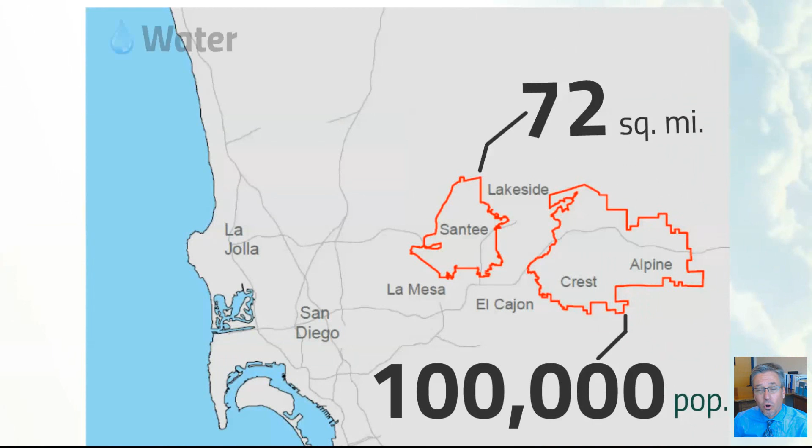First of all, water is like no other commodity. It touches every aspect of society, and it directly relates specifically to public health, safety, and our economy. The Water District was formed in 1955. Our mission is to provide highest quality service at the lowest possible cost. We have a rather unique water district, 72 square miles, a population of about 100,000 people. We have 4 core business components: water, recycled water, wastewater, and Santee Lakes.

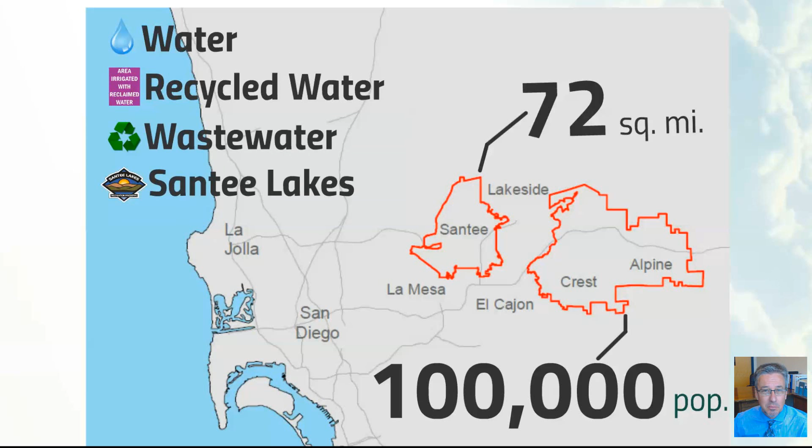And it's important to note that Santee Lakes, we're very proud of it. And we're proud of the fact that it is self-sufficient. It does not receive any tax or ratepayer subsidy. So none of our water or sewer fees that go to the district go to Santee Lakes. It is completely standalone, and it's a beautiful place. I encourage you to come out and check it out.

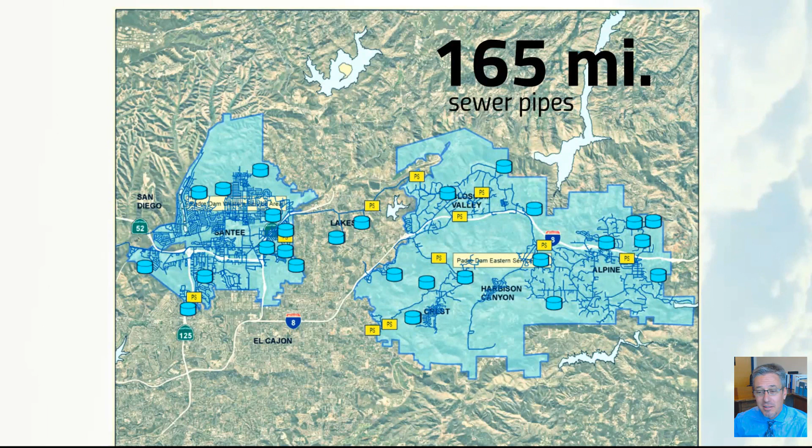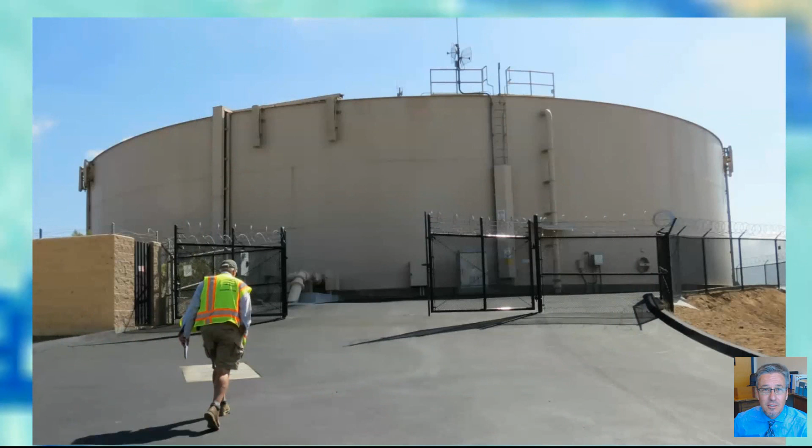A little bit more about Padre Dam: over 160 miles of sewer mains, almost 400 miles of water mains. We have 29 reservoirs throughout the water district and 19 pump stations. Reservoirs, you've seen many of these around the community. These are rather capital intensive facilities. This one, for example, is a 2 million gallon tank. The replacement cost of a facility like this is in the neighborhood of $7 to $10 million.

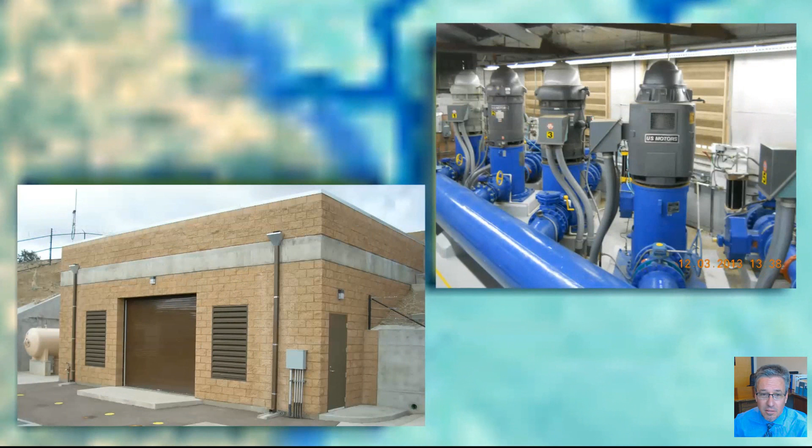Pump stations scattered throughout, again, the district. These are very expensive facilities as well. We have about $30 million invested in these pump facilities with a maintenance staff to keep the water flowing throughout our large water district. So just a little bit about the system and the work that is involved in maintaining that system. There are so many programs and projects and activities that occur in the maintenance area on the water and wastewater system every day. It's hard to pick just a few, but here's a couple just to highlight.

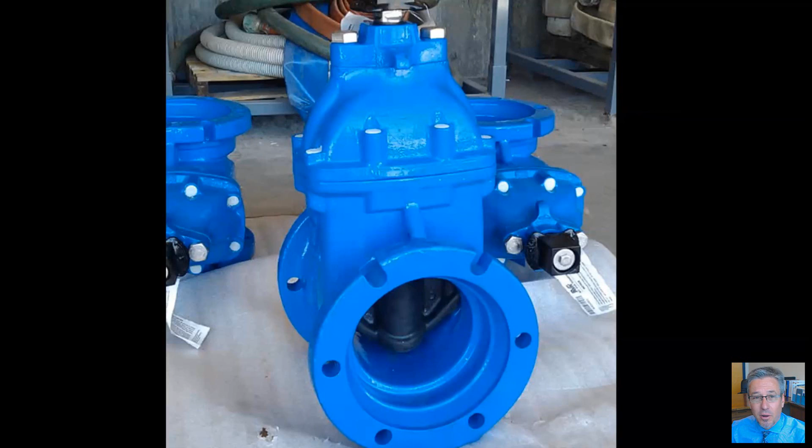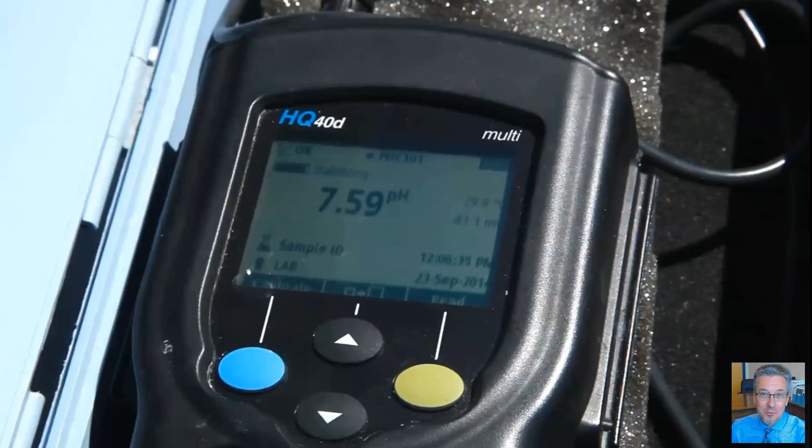This is our valve replacement program. We have over 9,000 valves in the system. These valves age and decay. It's important for us to replace these valves so that the system operates at an optimal level. In our water quality department, we have somebody watching the system 24/7, making sure that there's water in all of the reservoirs, that it's being moved appropriately around the district, that our water quality is at the highest level. And again, this is important work.

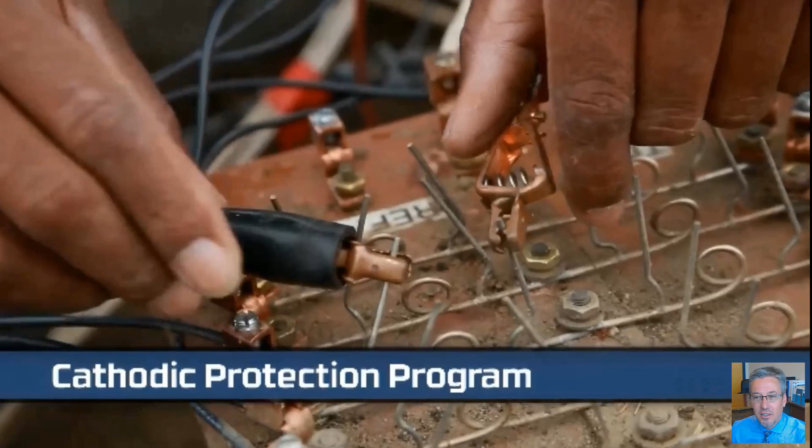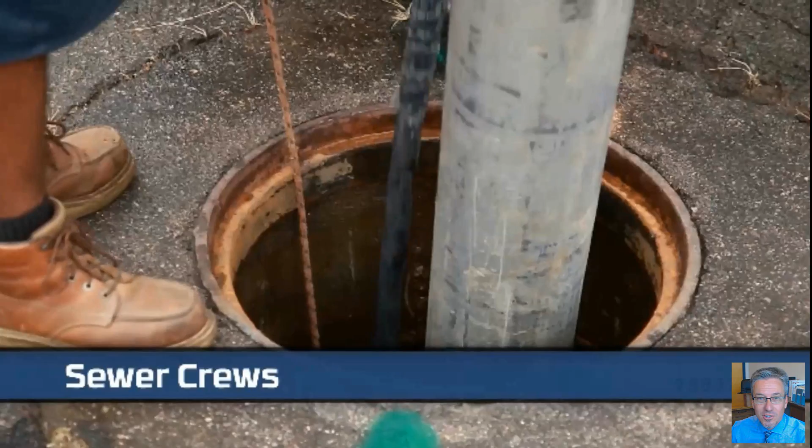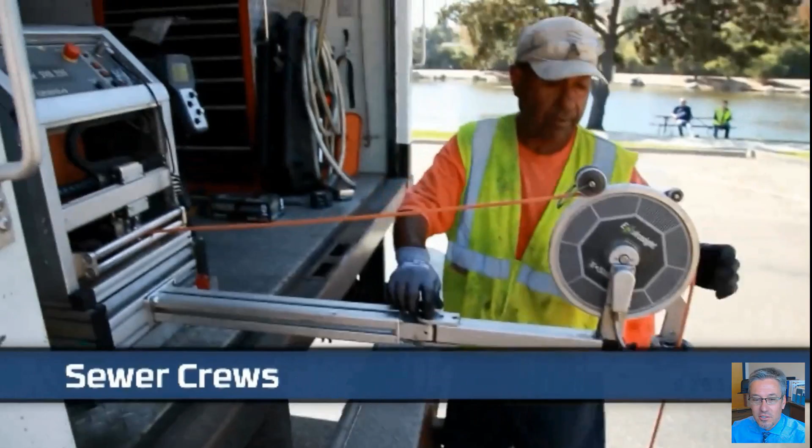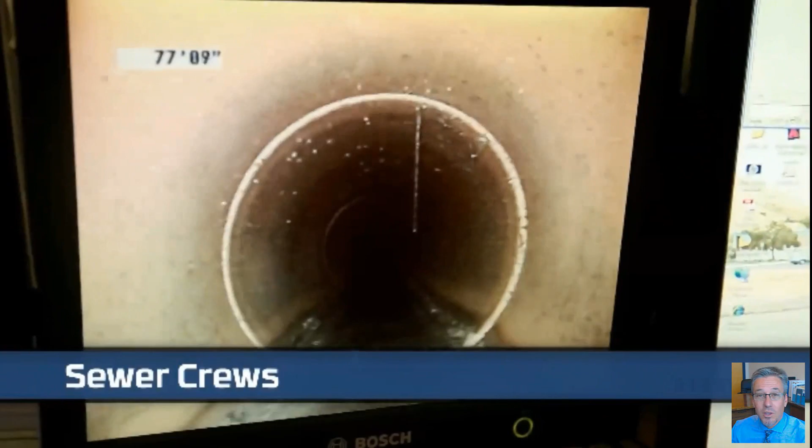Cathodic protection is an area where this group works to extend the life of all of our facilities and infrastructure through coatings, through cathodic protection devices, and again, this maximizes our investments. Sewer crews are on the western end of the service area, primarily in Santee. So if you're a western service area customer and you have sewer services with us, you will see these crews around your community. The system is very intricate and involved. We camera the system on a regular basis to make sure that it's working appropriately and that we can get ahead of any kind of potential failures in the system before they happen, hopefully.

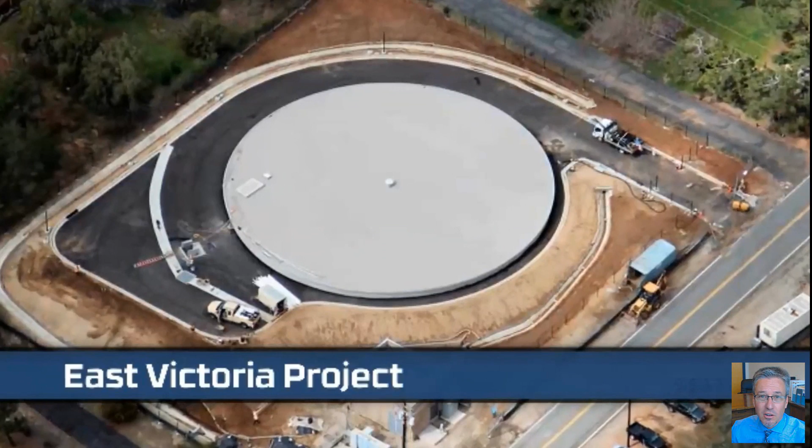Capital improvement is also an important program. These are multi-million-dollar projects investing in your system. Here's an example of a roof change-out. This is a reservoir roof.

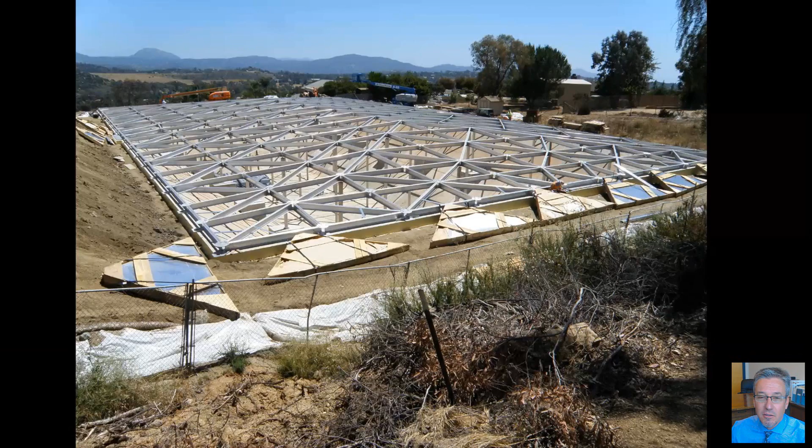This project, for example, was a $5.5 million roof retrofit project. So that's a little bit about your district. Let's get right into the dollars. Okay, so why is it important for us to make rate adjustments?

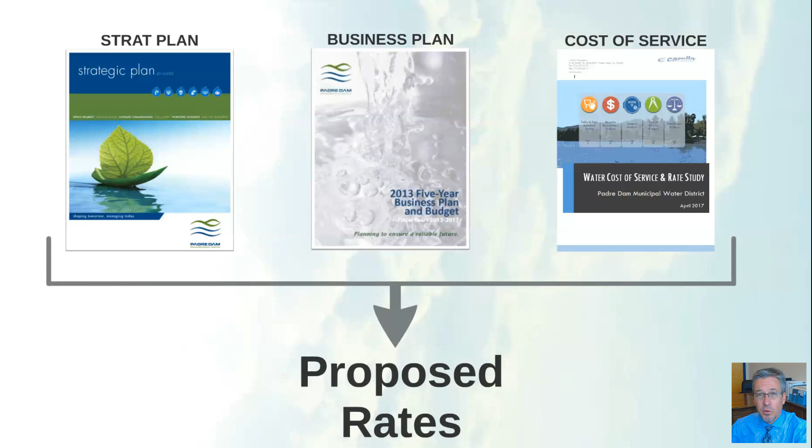Everything that we do centers around a plan. We have a strategic plan, a 10-year strategic plan that feeds into a 5-year business plan. And then what we do is we conduct what's called a cost of service study to determine how much it will cost to adequately maintain your water and wastewater systems. All of these plans and a cost of service study feed into the proposed rates. When we do the cost of service study, it tells us how much it will cost to maintain these systems.

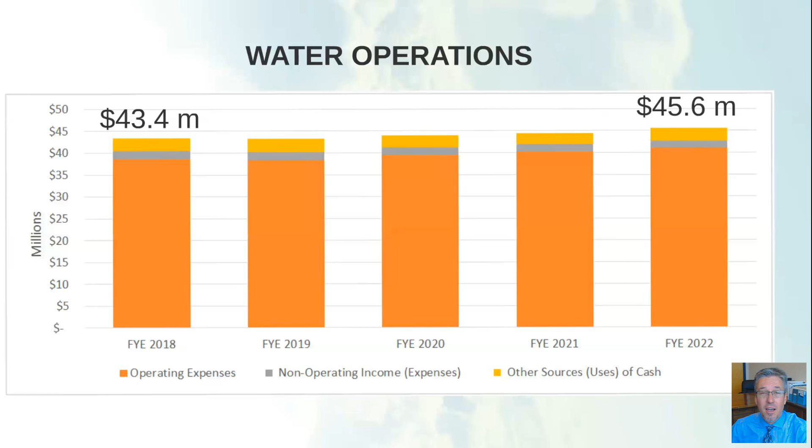On the water operations side, this is a chart that shows 2018 to 2022, and it shows us that in 2018, the cost to maintain that system will be $43.4 million. In 2022, that number will be $45.6 million, an increase. On the sewer side, same analysis, 2018, the system will require $15.7 million to maintain at an appropriate level. That number goes to $17.4 million to maintain at an appropriate level by 2022.

So the question, I think an appropriate question, is what is causing these rate increases? Cost of living continues to go up, as you know, in your household budget. There's some drivers on the district side that have caused these fees and cost expenses to go up. Regulatory compliance, legal compliance, energy costs, construction, materials and supplies, and insurance all are examples of increases that impact the cost to maintain this system.

I think an appropriate question is to ask, okay, what has the district done to mitigate some of these costs? What have you done to control expenses? I want to share with you just a couple. There's numerous to share, but we only have time for a couple. One of the most expensive components of our budget, of course, is employees. And what have we done in this area to help mitigate costs? With reduced water demands, what have we done to again mitigate those additional expenses?

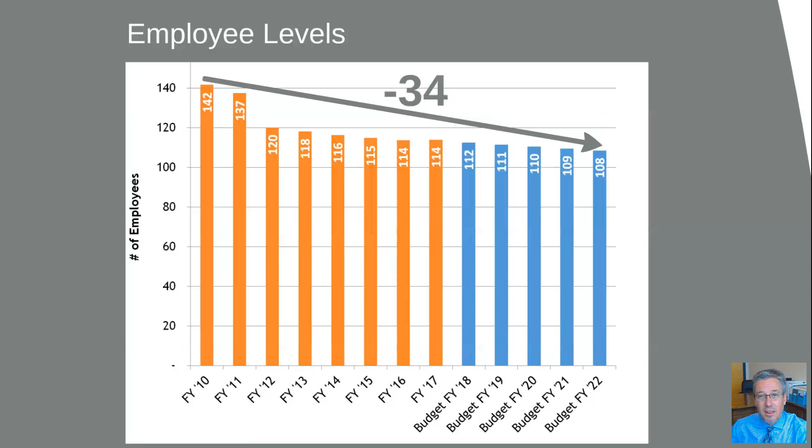Employee levels. This is a chart that shows back in 2010 we had 142 full-time employees at Padre Dam. Today, 2017, we have 114, a significant reduction. And then the blue bars show the next 5-year business plan and how we're proposing to go down another 5 to 6 full-time equivalents. So we will go down a total of 34 positions at Padre Dam, again, in efforts to mitigate and control the rate adjustments as best as we can.

So the big question, I think, for you is, what is the monthly impact? You're talking about rate increases. You're talking about adjusting our rates. What is that going to look like on my monthly water and sewer bill? Here is what we believe that's going to look like.

So this is a water bill example, and we have three different types of customers. We have a low water user. We have a typical customer that uses about 900 cubic feet per month. That's a typical customer in our district. You might fall into that category. And then we have a very high user, 30 HCF per month. This is a very high water user. So we wanted to give you three examples of what this looks like.

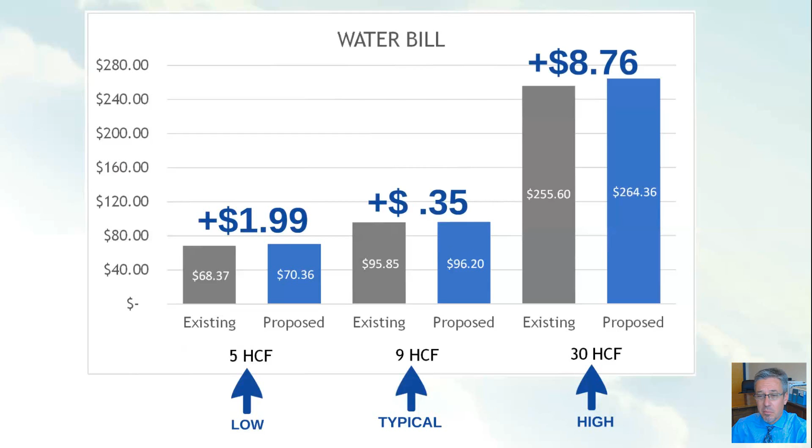So what is the bill impact? What is the monthly impact for each of these types of customers? For the low water user, it's about $2 a month increase on your water bill. For the typical customer, it's only 35 cents per month increase on the water bill. And then for the high user, of course, a little bit higher, about $8.76 per month increase on the bill. That's the water side.

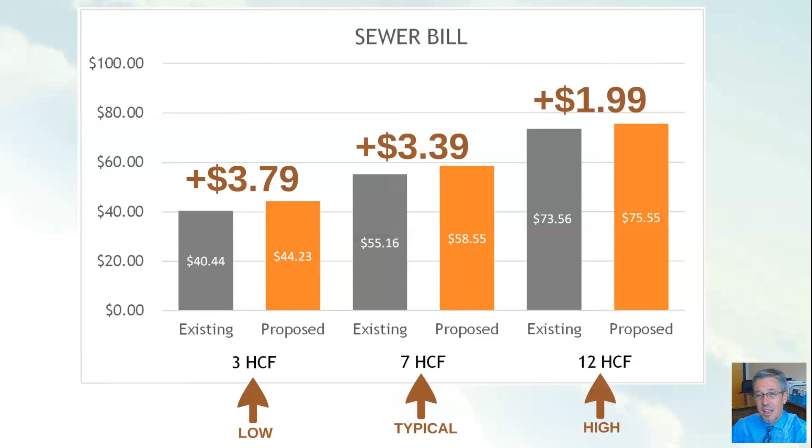On the sewer side, similar analysis. A low water user, 300 cubic feet, is about $3.79 increase per month. The typical customer, about 7 HCF, that's about $3.39 per month. And then a high user, 12 HCF, is about $2 per month increase. So that gives you an example of what you can expect on your water and sewer bill in terms of increases that we're proposing through this new 5-year business plan.

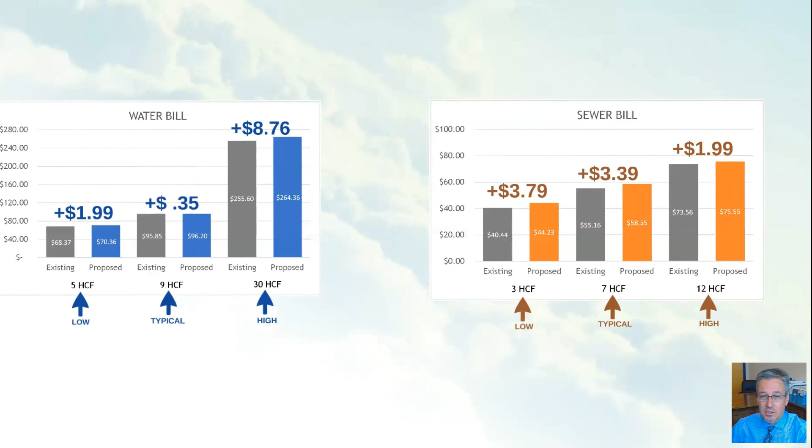I think another component that you need to be aware of is something that we don't have control over, and that is where we buy our water, the San Diego County Water Authority, and where we send about half of our wastewater, San Diego Metro wastewater system. These are costs that are passed through to customers, and we can only estimate on what those are going to look like. And we've done that for you here.

We estimate that the cost of your water on the water side through County Water Authority, a pass-through, will be equivalent to about $1 per month increase. Now this is $1 on top of, let's say, the typical water customer on the Padre side of 35 cents. So the total would be $1.35 increase on your water bill. On the wastewater side, we think that increase is going to be about $1.70. Again, you need to add these numbers to the Padre Dam increase, and that gives you your total bill impact. But these are pass-throughs that you should be aware of.

You need to know that we buy our water from County Water Authority. Their rates go up as well, and we have no control over that. And then the San Diego Metro wastewater, their rates go up as well, and these are passed through to the customers. We want to make you aware of that.

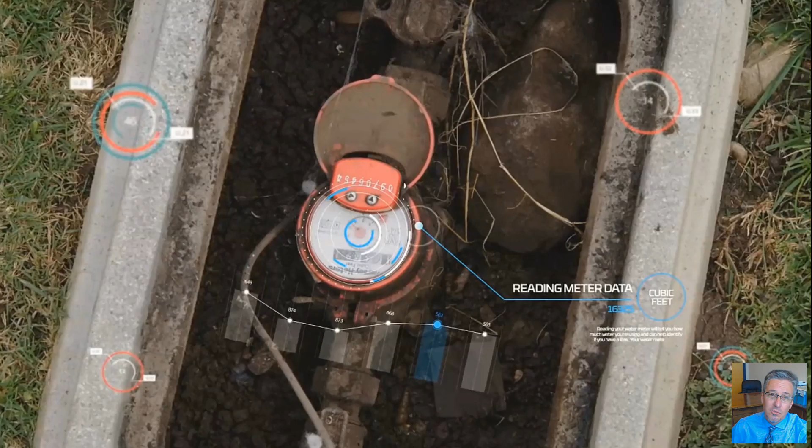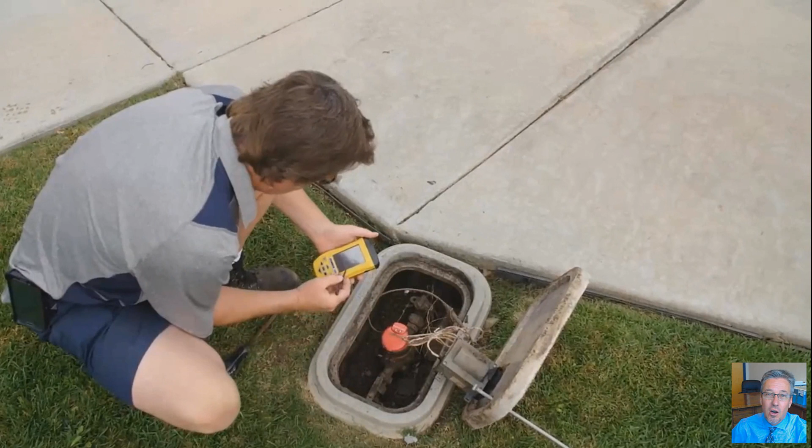So we also want to make you aware that we have tools and resources available to you. We have resources that help you control your water use and lower your water bill. We have an automatic meter reading system that sends data to our headquarters, and then that data is available to you online through a system called Aquahawk. You can log onto our website, access your account, and see exactly how much water you're using. You can set alerts, so if you use more water in a day than you typically do, you can get a text message that says, hey, something doesn't look quite right.

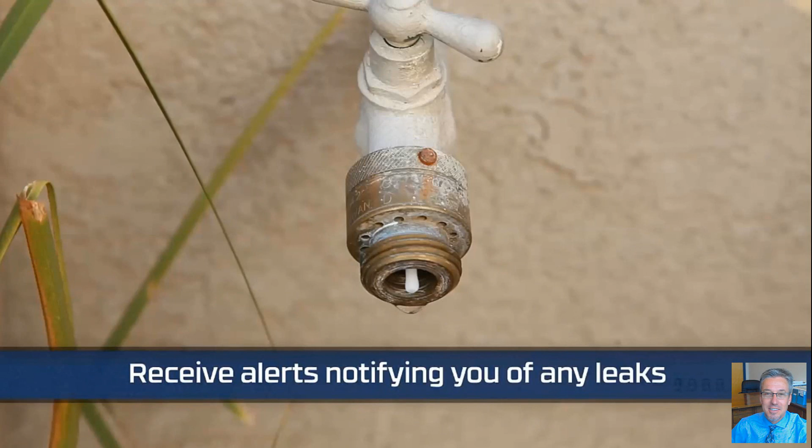Or if you have a leak, it will tell you that you've got a continuous flow, again, giving you a text message or an email to let you know that something isn't quite right with your water use. Our customer service staff stand by ready to help you in that regard.

In 2007, we were selling almost 16,000 acre feet of water. We buy water in acre feet. An acre foot is, if you envision a football field, about a foot high with water. That amount of water satisfies two typical single-family homes for about a year. Just as an FYI. So we were selling almost 16,000 acre feet back in 2007. Today, in 2016-17, we're only selling 8,000 acre feet, half of the water that we used to.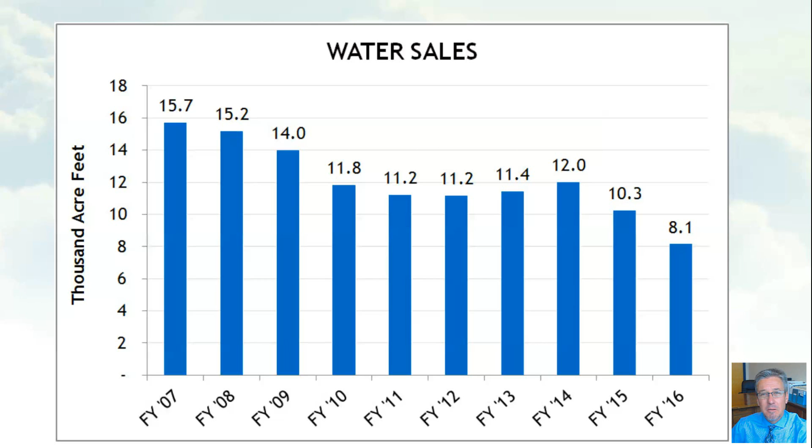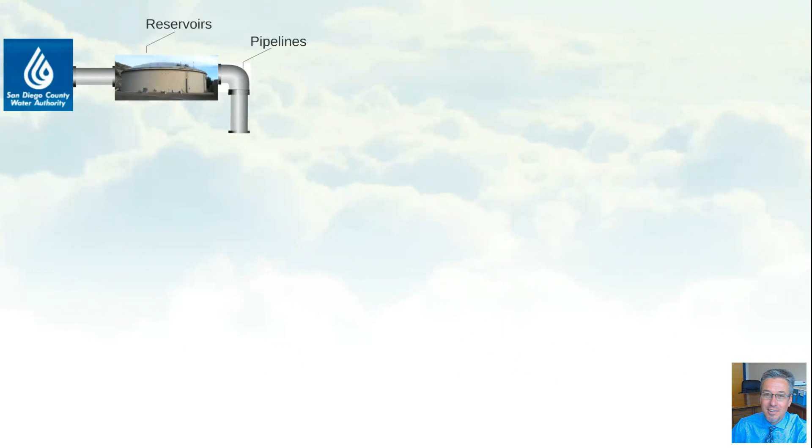And so that has an impact on the unit price. We have fixed costs that are associated with maintaining the system. When the water comes into our system, it enters our 29 reservoirs, our 500 miles of pipelines, our pump stations, and fleet and equipment that are necessary to maintain. All of these have a cost that doesn't change regardless of how much water is flowing through the system. Our repair and maintenance crews still need to maintain the system.

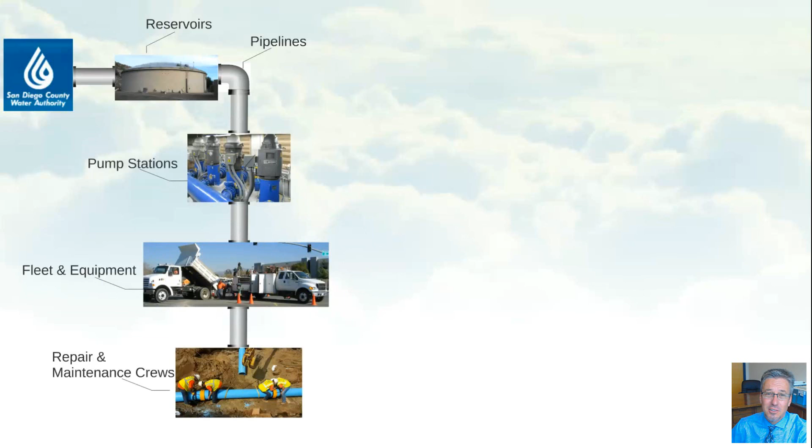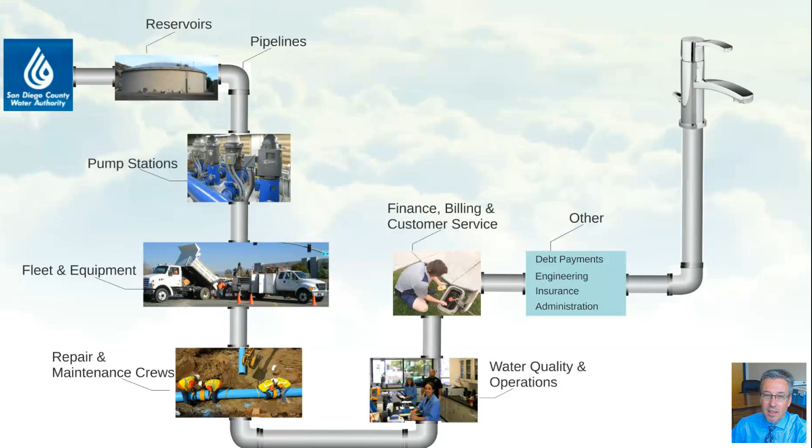Our water quality and operations folks still need to analyze and supervise the system on a 24-hour basis. Our finance, billing, and customer service. We still have debt service on existing investments, engineering, insurance. All of these things are fixed costs that don't change no matter how much water flows through the system. So we did an analysis to determine exactly what our fixed cost is, and that cost comes to about $24 million on an annual basis.

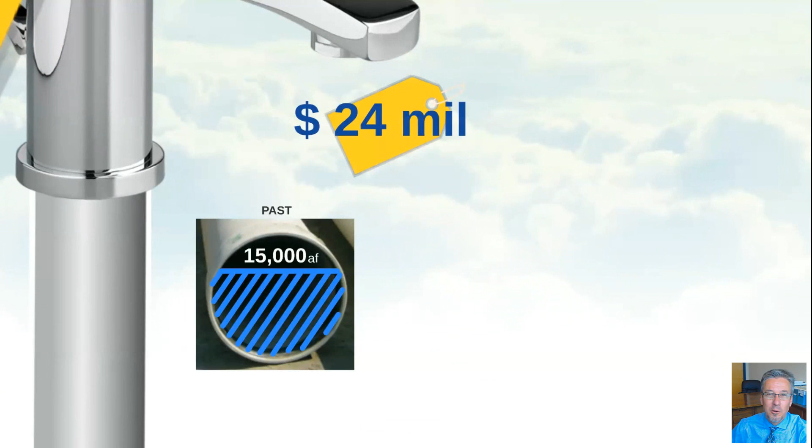So what does that look like when we're talking about flow through the system? If you have 15,000 acre feet, like we were distributing back in 2007, that has a price per unit, per acre foot.

It's totally different than if you're only pushing 8,000 acre feet through the system. If you're selling 15,000 acre feet, that cost per unit, $24 million divided by 15,000 acre feet, you come up with approximately $1,600. If you're only selling 8,000 acre feet, that means that cost per unit through that $24 million system is almost double. It's $3,000 per acre foot.

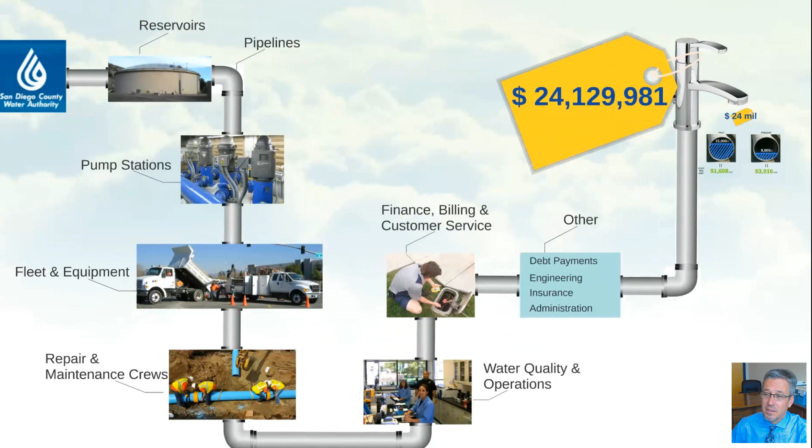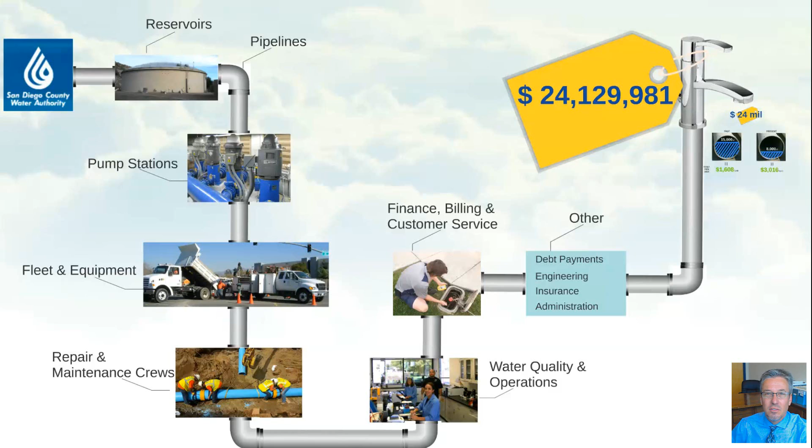That impacts our water bills. Unfortunately, there's a fixed component with maintaining the system that cannot change regardless of how much water is flowing through. Again, not great news, but it's something that I think you need to know about and you need to understand so that you can see why rates continue to rise, even though you're doing such a great job of conserving water. Another question is, how does Padre Dam rates compare to other districts?

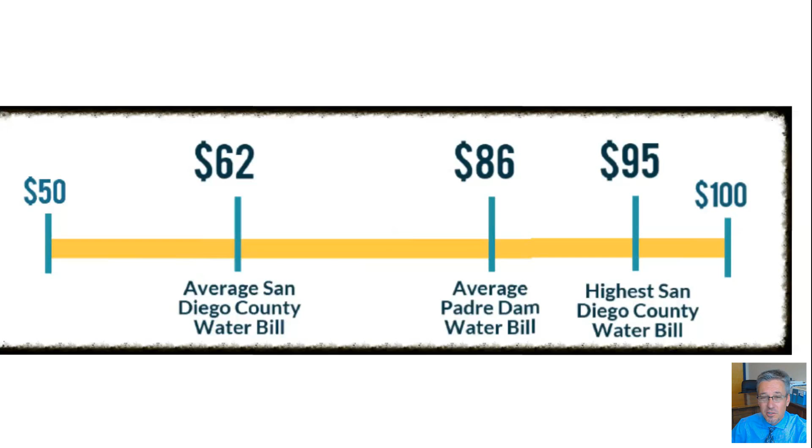But we're not the highest in the county. There are other water districts that have higher water bills than us. And the highest water bill in San Diego County is about $95. So the question is, why are we above the average? Why aren't we average in terms of price? Well, there's some drivers, and it's very difficult to compare one water district to another because there's so many factors. I'm going to share with you 3 factors that really impact Padre Dam's water rates: our large service area, our significant elevation change, and the fact that we don't have local water.

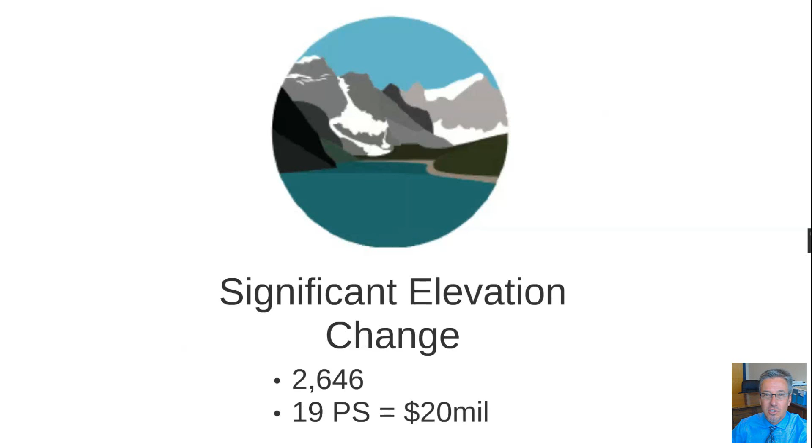First, the large service area. What this means is when we have less density in a water district, we have more infrastructure. So we have longer pipelines, we have more reservoirs, we have more pump stations, and of course we have staff to maintain all of those. And so what that means is we have more costs. And our district goes from Santee all the way up to Alpine. Part of that is a significant elevation change. There's over a 2,500 foot elevation change from Santee up to Alpine, and that has costs associated with it. 19 pump stations, again, $20 to $30 million of investment in those pump stations.

The most significant, though, is no local water supply. Just a little over half of the water agencies in San Diego County have their own local water supply. That means they have water available to them, some of which at no cost. For example, there is a water district adjacent to us that is allowed to extract water out of the ground through legal action that occurred back in 1930. They're able to extract 20% of their water supply directly from the ground at no cost. There's of course cost to pumping and some treatment, but that's free water that greatly positively impacts their rates. We don't have access to that.

Another water district adjacent to us owns a reservoir up in Julian. When it snows up there and rains up there, they collect that water. It flows down here to them, and again, that's free raw water that they're able to put into their system at no cost to the ratepayers. And so, unfortunately, Padre Dam doesn't have that same benefit, and those are the issues that we have to deal with in terms of our rates. So we still believe that tap water is still a really good deal. When you look at the fact that it's delivered to your home for less than 2 cents a gallon compared to other commodities, we think it's a good deal.